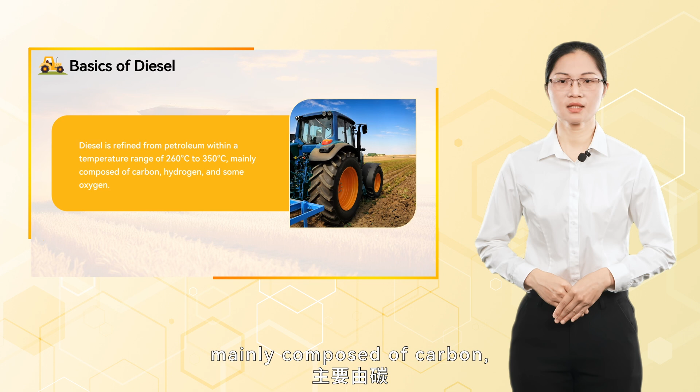1. Basics of diesel. Diesel is refined from petroleum within a temperature range of 260 degrees Celsius to 350 degrees Celsius, mainly composed of carbon, hydrogen, and some oxygen.

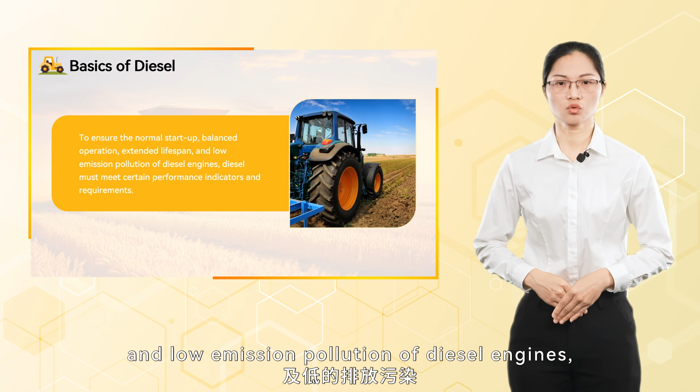To ensure the normal startup, balanced operation, extended lifespan, and low emission pollution of diesel engines, diesel must meet certain performance indicators and requirements. The main indicators of diesel include ignitability, volatility, fluidity, stability, corrosiveness, etc.

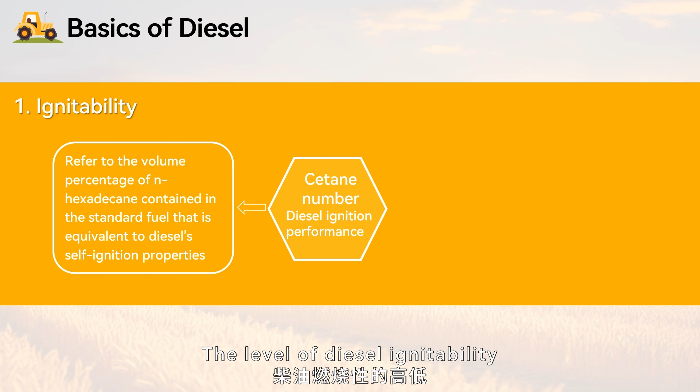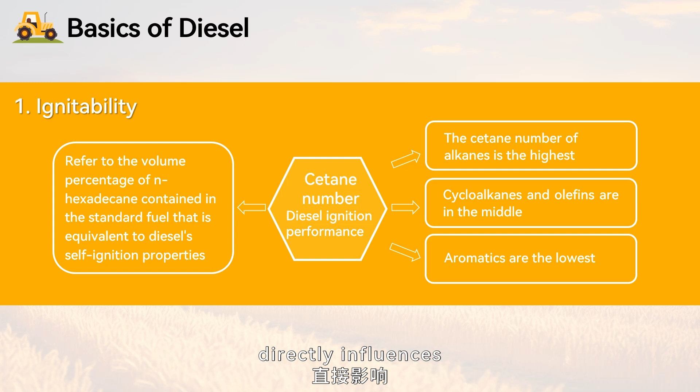1. Ignitability, combustibility. The level of diesel ignitability directly affects the operation of diesel engines. The cetane number is an important indicator of diesel ignition and combustion performance in the engine. The cetane number of diesel directly influences the combustion process of the fuel in the diesel engine.

A higher cetane number means a lower auto-ignition point, making it easy to self-ignite in the diesel engine cylinder, resulting in smooth engine operation. If the cetane number of diesel is too low, it becomes difficult for the fuel to ignite, leading to abnormal combustion and reducing engine power.

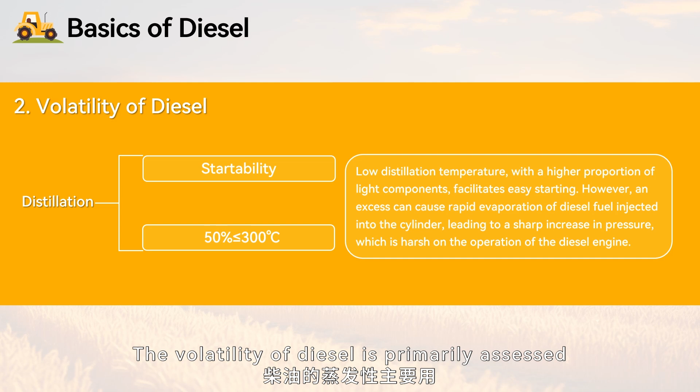2. Volatility. For an engine to start and operate smoothly, diesel must possess good volatility. However, the volatility should not be too high, because an excessive evaporation rate can accumulate a large amount of diesel during combustion, leading to unstable engine operation. The volatility of diesel is primarily assessed through its distillation range and closed flash point.

3. Fluidity. The fluidity of diesel is mainly indicated by its viscosity, pour point, and cold filter plugging point.

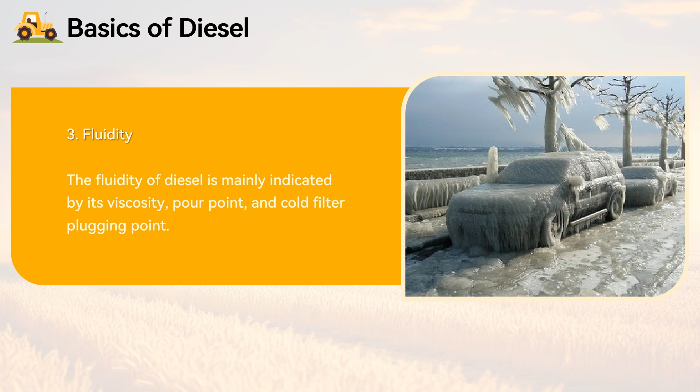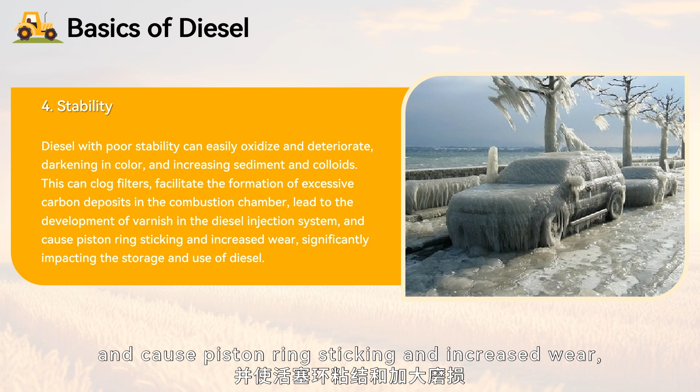4. Stability. The stability of diesel affects the engine like gasoline. Diesel with poor stability can easily oxidize and deteriorate, darkening in color and increasing sediment and colloids. This can clog filters, facilitate the formation of excessive carbon deposits in the combustion chamber, lead to the development of varnish in the diesel injection system, and cause piston ring sticking and increased wear, significantly impacting the storage and use of diesel.

2. Classification of diesel. Diesel can be classified into two categories based on distillation: light diesel and heavy diesel. Each type of diesel has its specific range of applications.

Light diesel is suitable for high-speed diesel engines operating above 1,000 rounds per minute. Heavy diesel is designed for diesel engines operating below 1,000 rounds per minute. Tractors typically use high-speed diesel engines as their power source, thus they utilize light diesel.

Even within the category of light diesel, there are several different classifications. Based on pour point, light diesel can be divided into 7 grades: 10, 5, 0, -10, -20, -35, and -50. In selecting a diesel grade, the following principle must be followed.

The cold filter plugging point of the diesel should be lower than the lowest temperature of the environment where it will be used. The choice of light diesel grade should be made according to different regions, temperatures, and seasons. Generally, the selection can be based on the following guidelines.

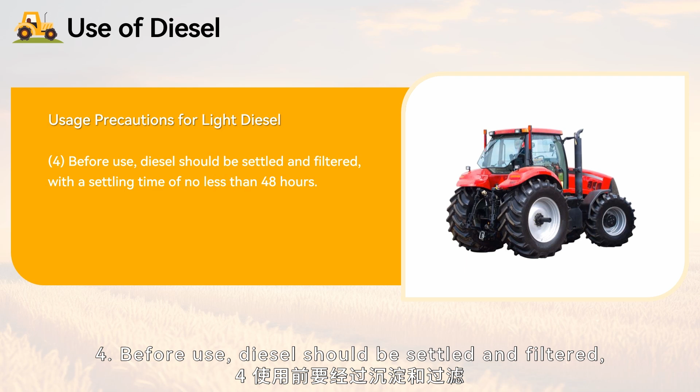4. Before use, diesel should be settled and filtered, with a settling time of no less than 48 hours. 5. The use of inferior quality diesel is strictly prohibited. Fuel must be free of impurities and moisture.

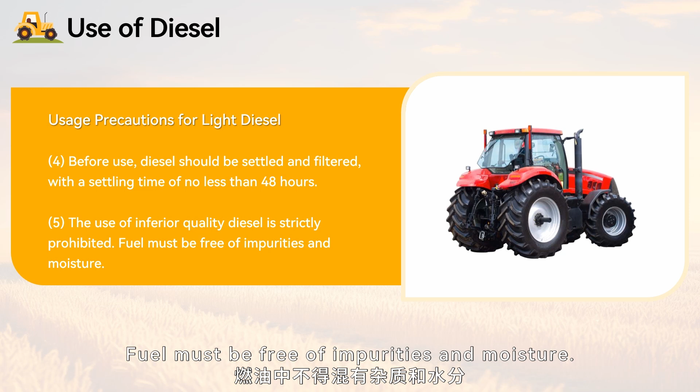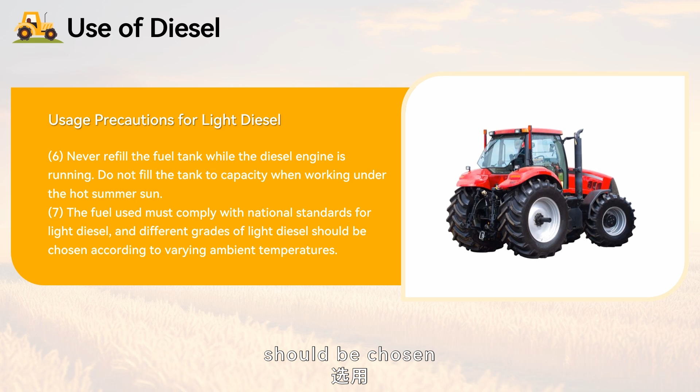6. Never refill the fuel tank while the diesel engine is running. Do not fill the tank to capacity when working under the hot summer sun. 7. The fuel used must comply with national standards for light diesel, and different grades of light diesel should be chosen according to varying ambient temperatures.

Finally, during the use of light diesel, the impact of mechanical impurities, moisture, and colloidal substances on the diesel engine cannot be overlooked. Diesel inherently contains a certain amount of colloids, which can catalyze the formation of new colloids during storage and transportation, leading to blockages and carbon deposits.

To ensure the high cleanliness of light diesel and prevent it from affecting the normal operation of the engine, pay attention to the following issues during storage, transportation, and refueling. 1. Keep fuel containers and refueling tools clean. 2. Ensure fuel containers are capped to prevent foreign objects from falling in.

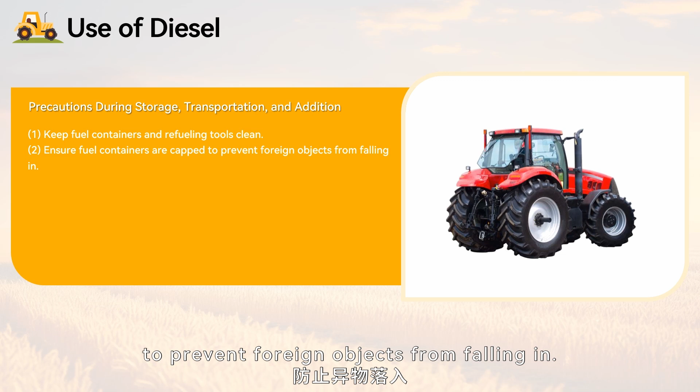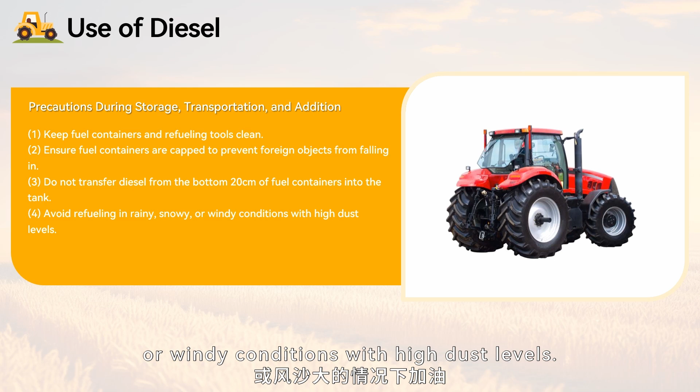3. Do not transfer diesel from the bottom 20 centimeters of fuel containers into the tank. 4. Avoid refueling in rainy, snowy, or windy conditions with high dust levels. 5. Diesel is flammable, so take precautions against fire during storage and use.

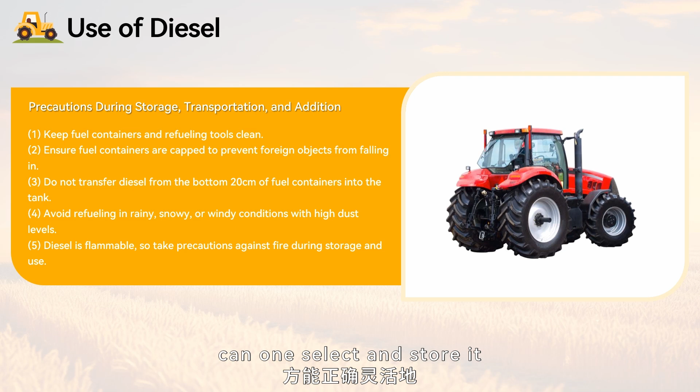Only by fully understanding the specifications and properties of diesel can one select and store it correctly and intelligently. In this lesson, we have gained some fundamental knowledge about diesel, such as its classification into light and heavy diesel, and the 7 grades based on pour point.

We have also mastered the rules for using diesel. All this knowledge will help us in our future work.

Please consider the following questions after class. 1. What are the characteristics of diesel? 2. How many types of light diesel are there? What are they? 3. What precautions should be taken when using diesel?